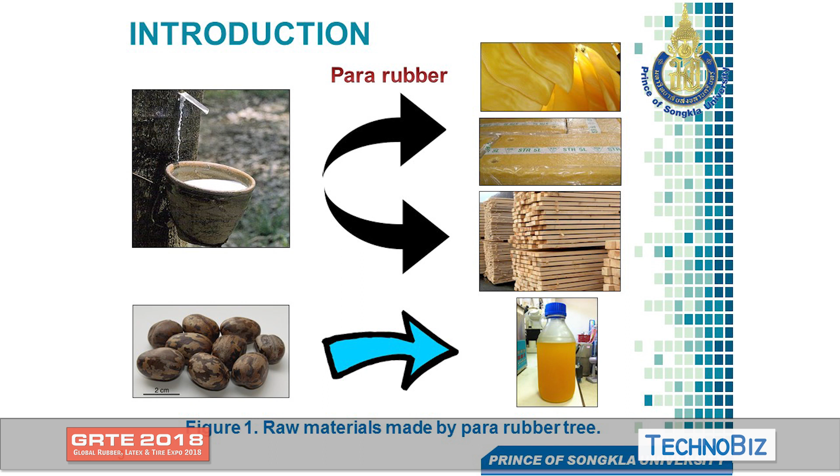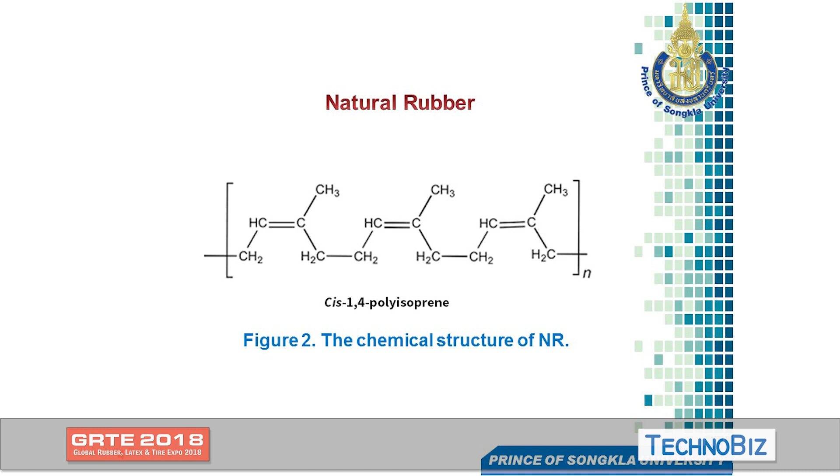Comparing natural rubber with synthetic rubbers, natural rubber can undergo strain-induced crystallization. At lower strain or lower deformation, nothing happens. It's just like SBR or synthetic rubbers. Once we apply high stretching or higher deformation, the stress upturns, sharply increasing, meaning that strain-induced crystallization occurred in the natural rubber.

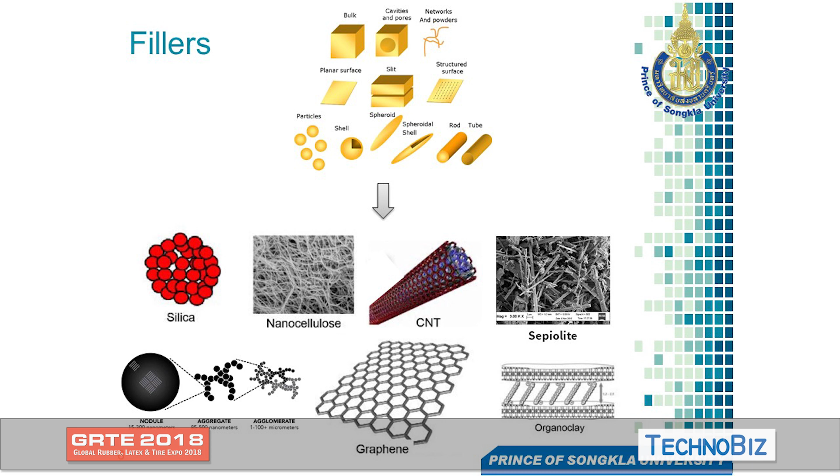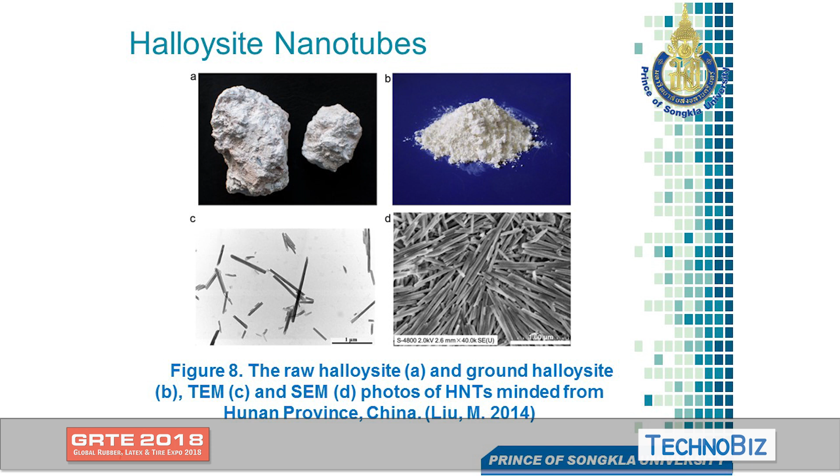Now I'm focusing on clay. In my case, I'm studying the incorporation of halloysite nanotubes. Halloysite nanotubes are chemically similar to clay, but the geometry or shape is different. Clay is normally stacked and laminated together, but halloysite nanotubes come from layers that fold into hollow tubes.

The layers fold together into tubes. The inner surface consists of hydroxyl groups, and the edges also have hydroxyl groups, but the outer surface consists of siloxane groups. It's just like normal mineral fillers such as clay or silica.

In this study, I'm focusing on the use of halloysite nanotubes in natural rubber and what happens to the strain-induced crystallization afterwards. We have observed that halloysite nanotubes can enhance the strain-induced crystallization of natural rubber.

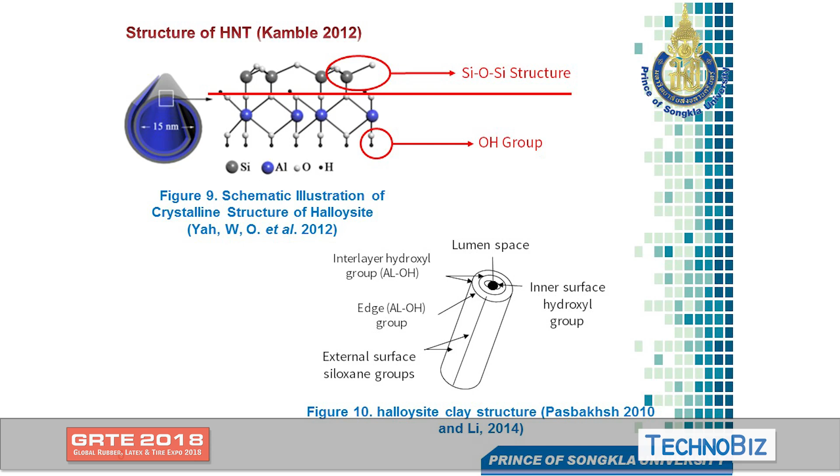Okay, before going to my experiment, let me briefly introduce some major factors affecting the reinforcement. Reinforcement means once you put the fillers inside the natural rubbers or other polymer matrices, it can improve the mechanical strength or mechanical properties. So there are some major factors affecting this kind of properties.

For example, filler dispersions or volume fractions. Once we increase the volume fractions, the fillers will agglomerate or aggregate, making the properties drop drastically. There is a certain amount of fillers and certain dispersibility that can give optimum properties to the rubber composites.

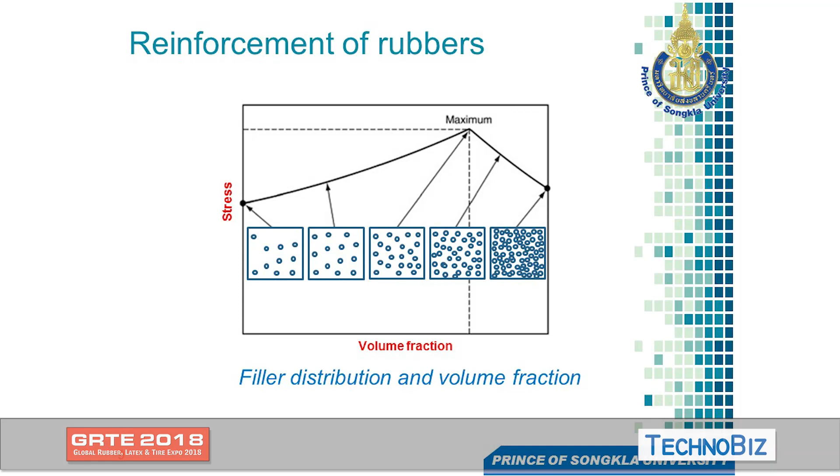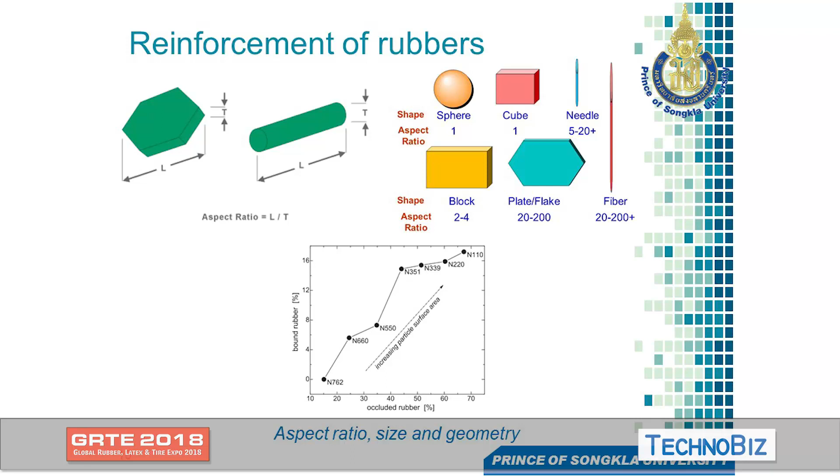So this is the example of the bound rubber content. Once we reduce the size of fillers used in the rubber or polymer matrix, it can increase the bound rubber content. So here is the example. We prefer as small as possible and as high aspect ratio as possible to make the polymer matrix stronger.

Once the reinforcement is there, normally we have to investigate the reasons behind the reinforcement. So normally we check the bound rubber contents. The more bound rubber content, that means there are rubber filler interactions. So we normally study the rubber filler interactions in order to support the research findings.

Another thing is Payne effects. Normally in this kind of study, we study over the strain amplitude. Once we input high strain, we see whether the filler network is there or not. If the rubber filler interaction is there, the difference between storage modulus at lower strain and higher strain will be reduced. A small difference means there's high rubber filler interaction.

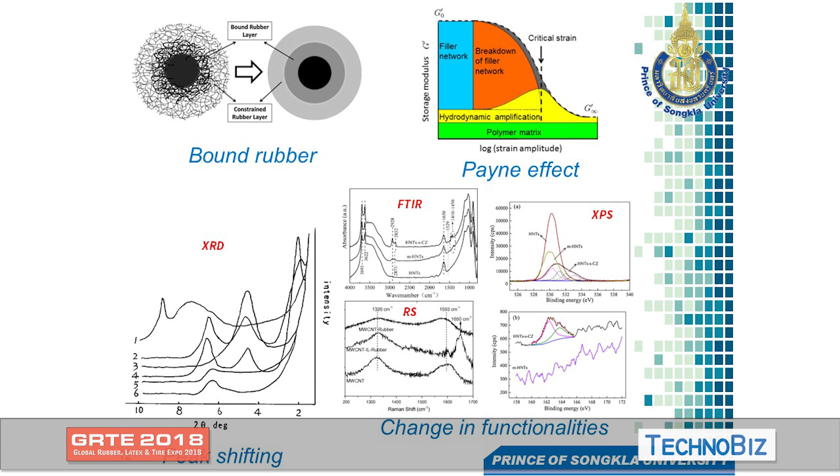Depending on the materials or what you are going to study, you choose whether to use wide angle or small angles. So in my case, I have studied using typical XRD first to see whether my interested peaks are in the range of wide angle or not. Then we choose whether to choose the wide angle or small angle scattering.

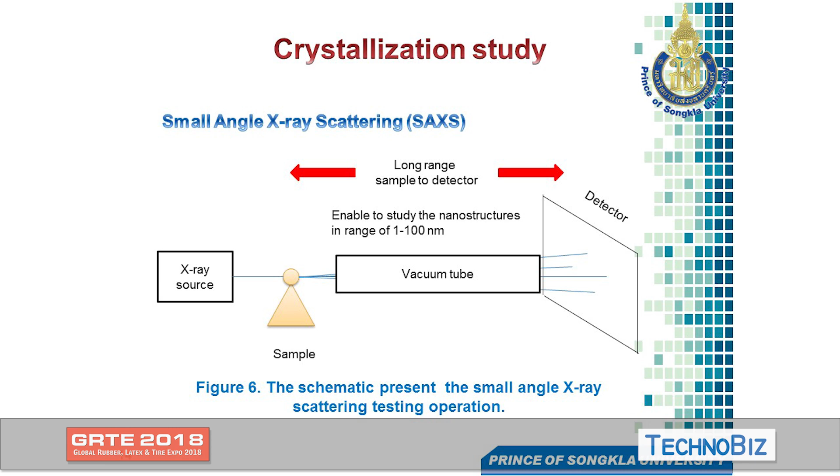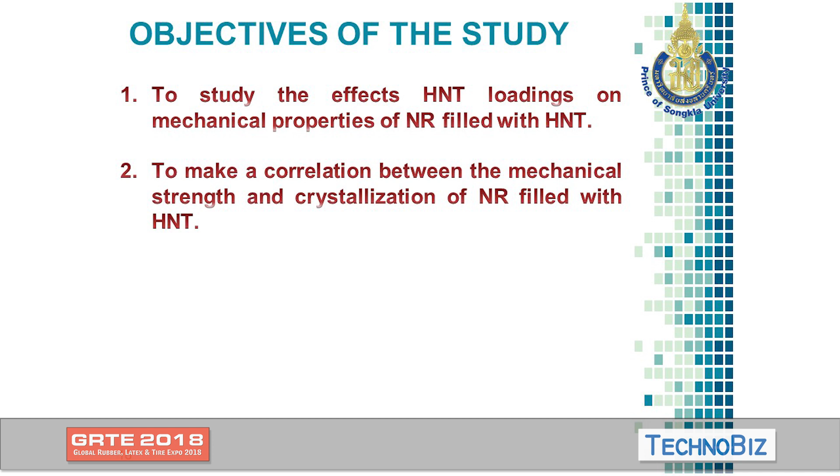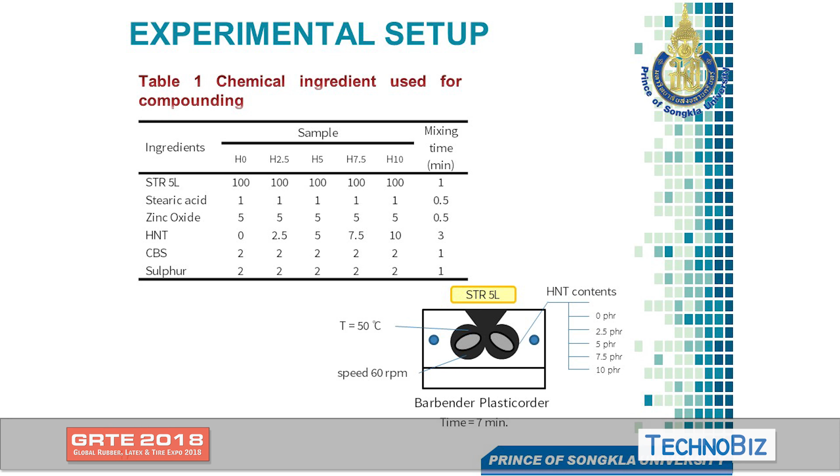Okay, my objective of the study is to study the effects of the HNT loadings on the properties, and then make a relationship between the mechanical properties or tensile properties with the crystallization observed after being stretched. Here's the formulations and preparation. The composite was prepared in the internal mixer with certain temperatures, certain rotor speed, and the loadings were 0 to 10 phr.

As for the testing analysis, we study the curing characteristics and tensile properties. And the next one, the wide-angle X-ray scattering. So we study the degree of crystallinity and orientation parameters to see the orientation, whether it is an isotropic or anisotropic alignment.

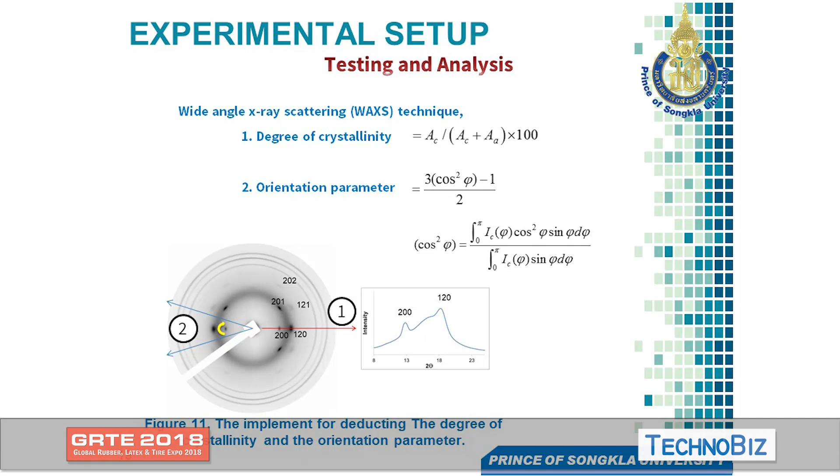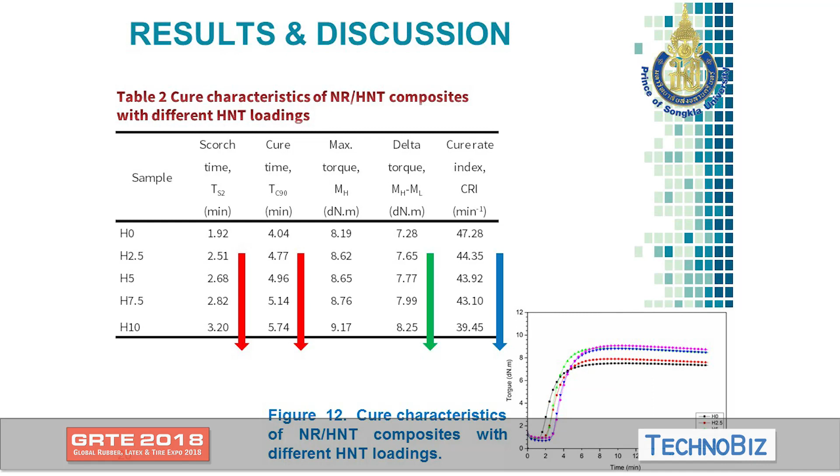Here's the result of the curing characteristics. This is very common for clay materials because they consist of siloxane on the surface. So basically, it will absorb the accelerators, making the vulcanizing process delayed. So this is very common. And the maximum torque and torque difference are also typical findings, because we include solid or rigid fillers inside the rubber matrix, making the maximum torque and torque difference increase. This is a very typical result.

Okay, this is the typical XRD, the common XRD without being applied with wide angle X-ray or small angle X-ray. So here we can see the interested peak of the HNT, which is at the 12.13 angle. This is the crystal peak of HNT. This is just to confirm whether the HNT is there or not.

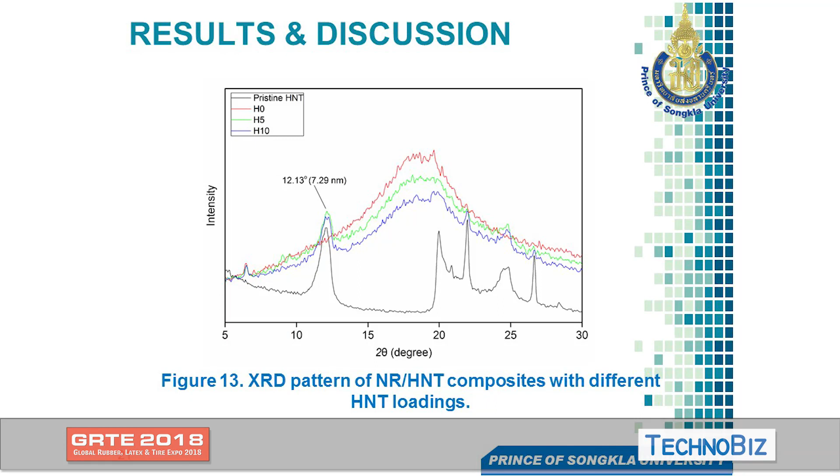So once we include the HNT inside the rubber, this is the crystal peak of the natural rubber filled with the HNT. We can see it's like a stoop here. So this is like an amorphous region. If amorphous is there, it's like a stoop over here. So the curve is not linear as it is in the case of HNT.

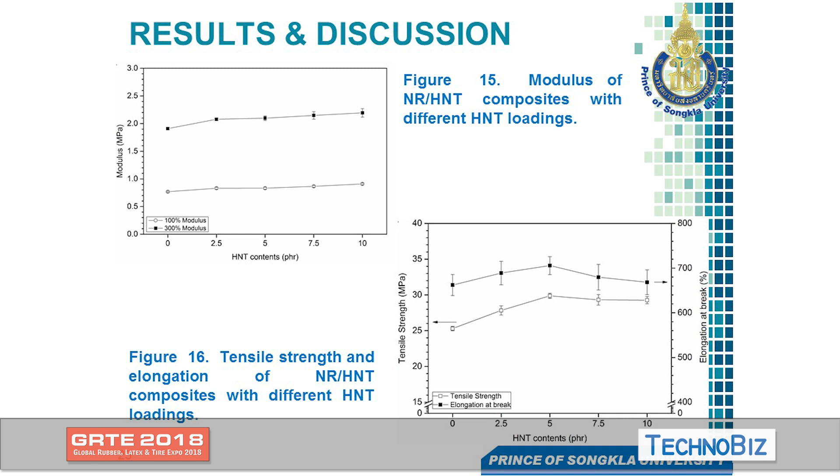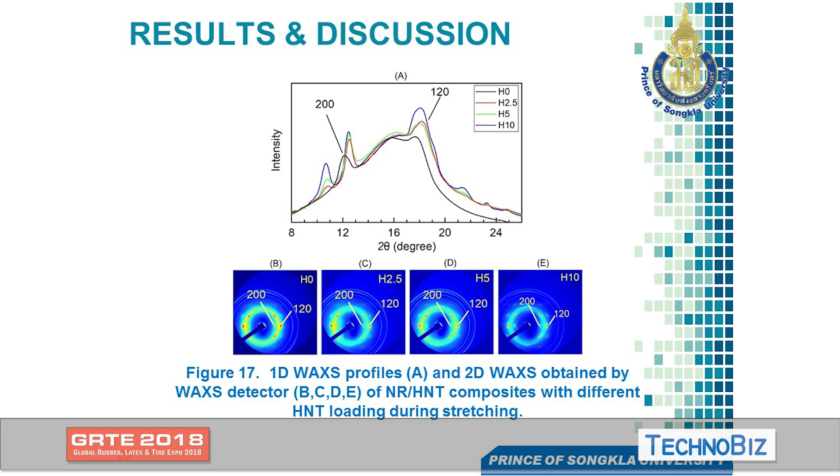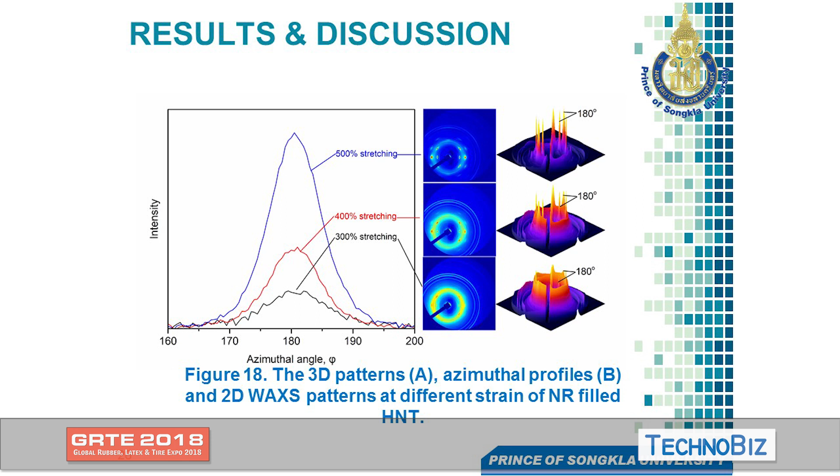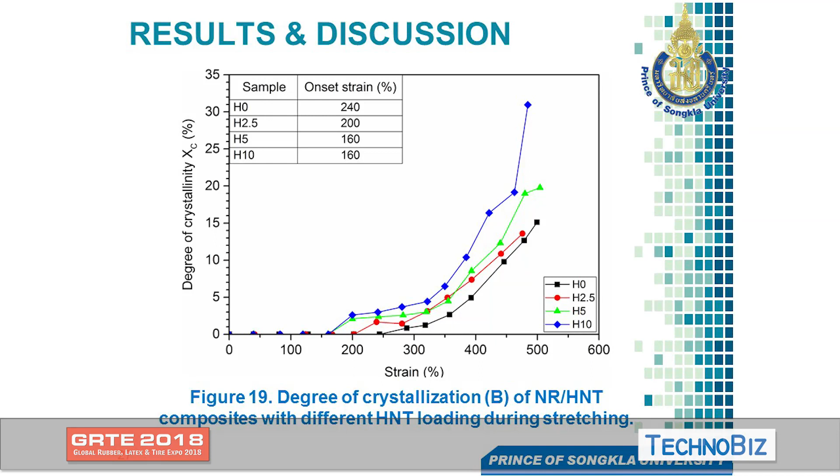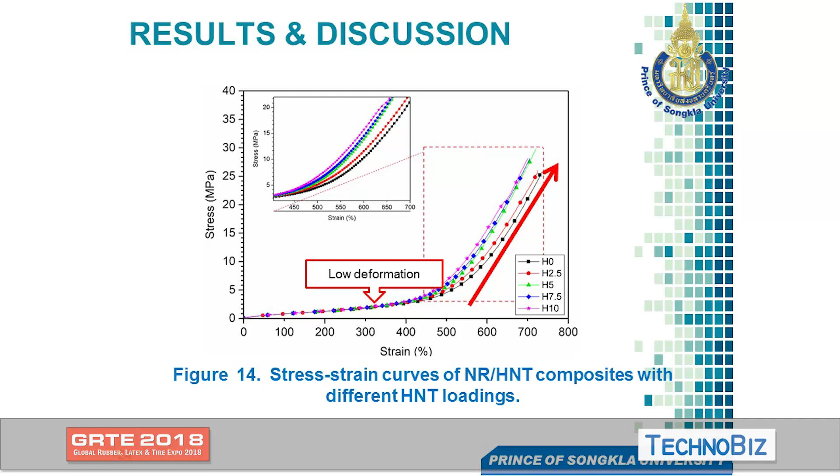But comparing the unfilled one and filled one, this figure is in very good agreement with the stress-strain curve. Over here, it's almost the same. So that means we can make a correlation between the tensile properties and the crystallization of the natural rubber filled with the HNT.

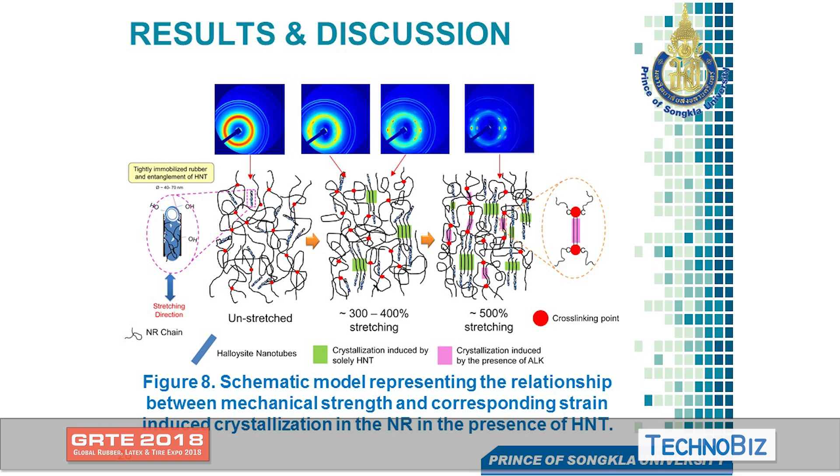So basically, without HNT, this kind of thing happens at higher deformation. Once we include the HNT, the HNT can rearrange together with the molecular chains once the strain is applied. Due to the better dispersion and compatibility between HNT and natural rubber, it can enhance this kind of effect. So that means HNT can improve strain-induced crystallization in natural rubber.

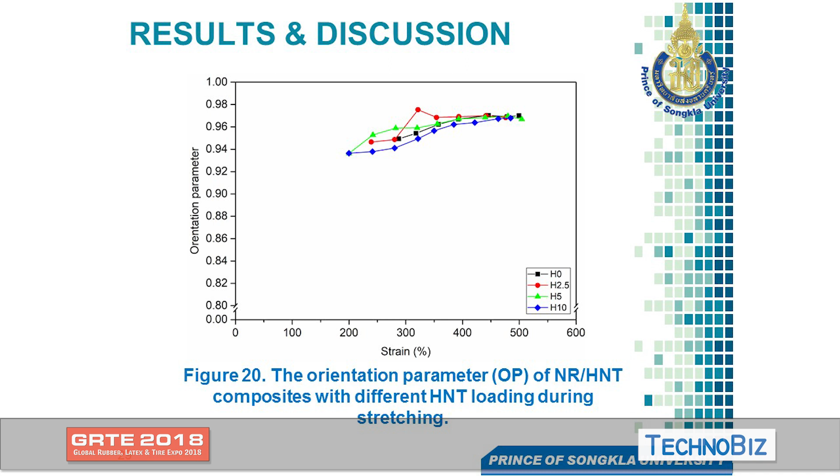But the most interesting thing over here is, once we put the higher amount of filler at 10 PHR, we can see that the orientation parameter is lower than other additions of HNT, assuming that agglomeration is there. Once agglomeration or aggregation is there, it changes the alignment of the stretched molecular chains.

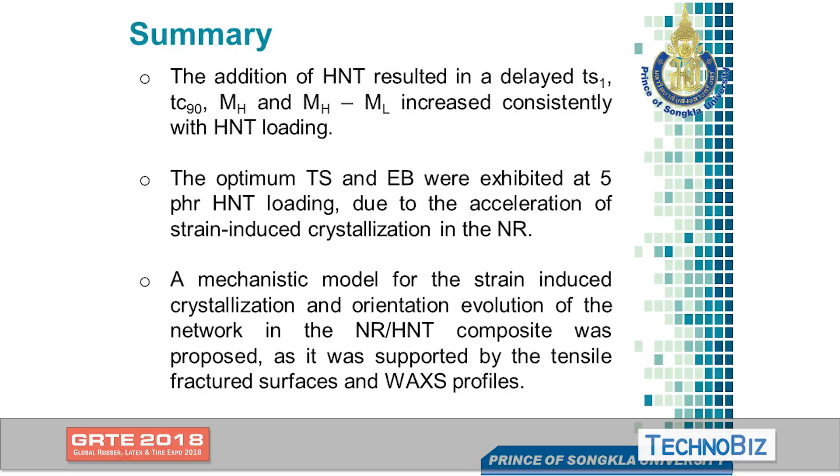Yes, our concluding remarks. As you saw before, the scorch time and cure time are longer once we include the HNTs. The maximum torque and torque difference are typical findings because we include rigid fillers, reducing the fraction of the rubber, so the maximum torque and torque difference increase. Tensile strength and elongation at break peak at 5 PHR.

And then we also make a relationship between the strain-induced crystallization with and without HNTs. As you saw before, once we include the HNT, it lowers the strain requirement, to lower deformations. We use only low deformations to start crystallizing the natural rubber composites.